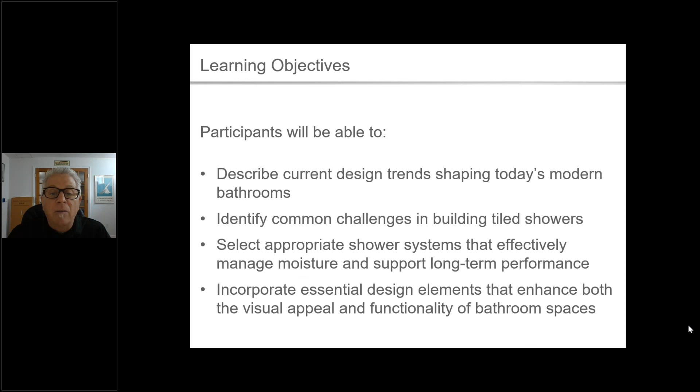But the whole idea now is we're really creating this spa or retreat-like environment - primary bathrooms, even some secondary bathrooms, where we're getting into a lot of design elements. There's a few of them here that you can see. We're going to cover a lot of the stuff, but there are some challenges to this - these are really the changing needs. Certainly the large format tile is something that's on trend and still continues to be on trend. Seems like the tiles are just getting larger. If that's a design trend you're following, certainly you're aware of that.

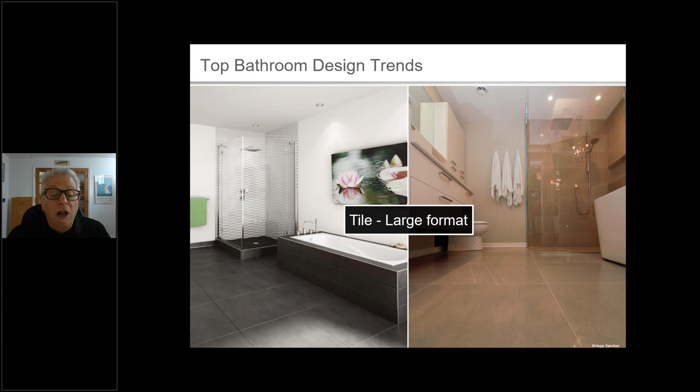The wood look is still out there, the ones that look like stone. These pattern and encaustic type of tiles are back in style on the floor. Even on the left-hand side there, you can see an artfully placed design of different colors and shades to get these type of looks.

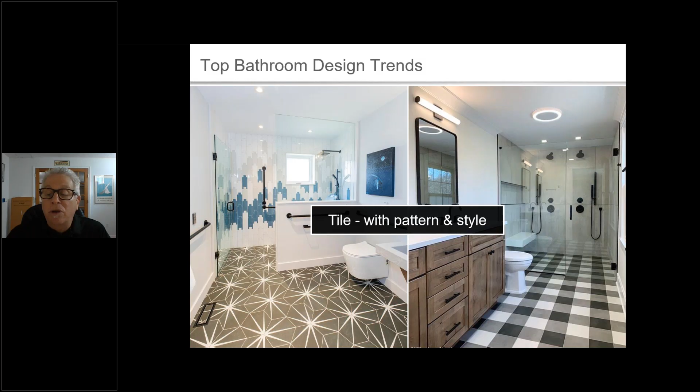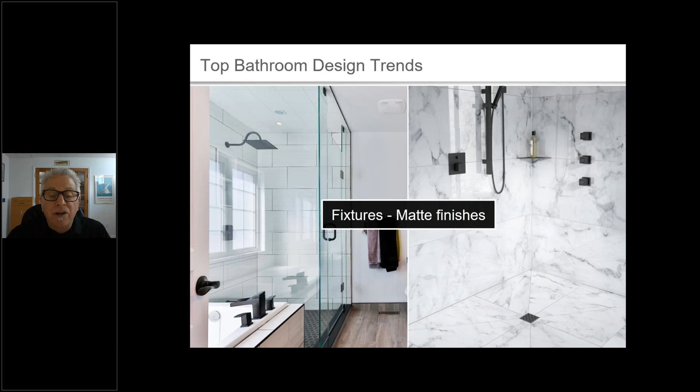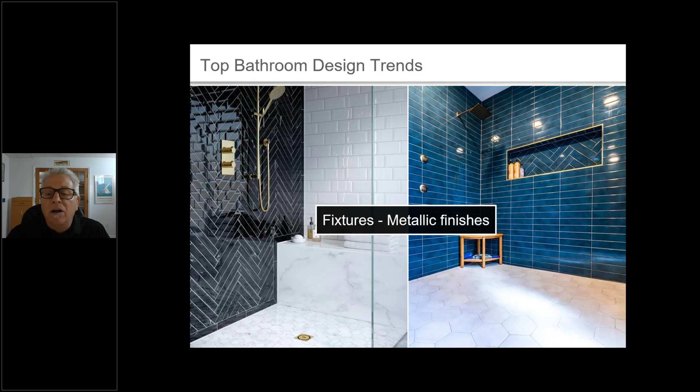So these are all the design elements and styles that you're starting to see. Again, in the fixtures themselves, matte black and matte finishes in various shades are very popular and continue to be. I find this kind of funny after being in the trade so long - I thought we tore all that 80s gold out way back when, but no, it's back again.

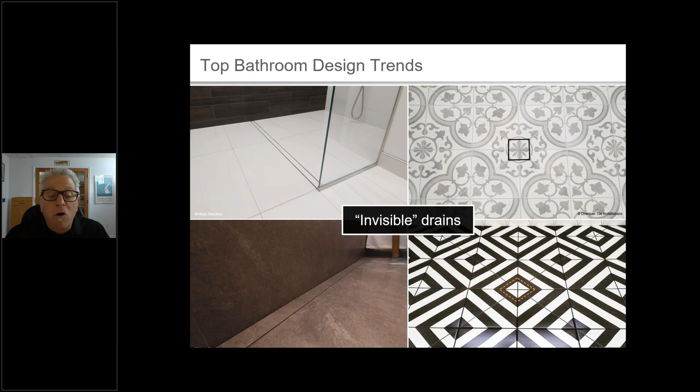But they're a nicer tone, a nicer shade, softer types of metallics that are out there now. And of course, invisible drains - the whole idea is that you don't interrupt your style or pattern. You just sneak the drain in, and you can see them in the images on screen. We'll take a look at both line drains and point drains, which you see in these four images.

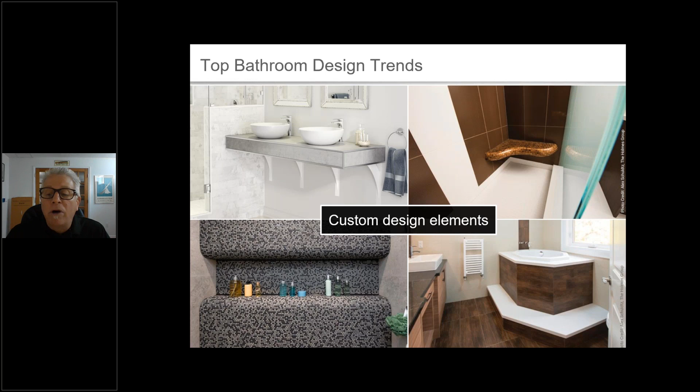Also these kind of custom design elements - this is where I was speaking about how, when you try to incorporate these things with old school methods, it was very hard to get waterproofing and moisture management right. You were using building materials that were water sensitive. But certainly these things are much easier to achieve now, and fit into the workflow, meaning it's not going to add a lot of additional cost or time to incorporate these elements.

Some of the other things - it's not really a design trend, but it's certainly a growing trend and something consumers love - is a heated floor. Certainly if you have a heated floor, you're never going to want another tile job that isn't heated, and the bathroom would be the primary place for that. So we're going to take a look at introducing a warm floor, even the bench top, into this environment too.

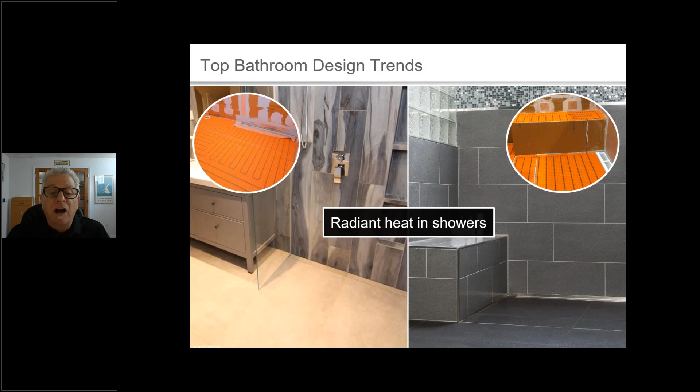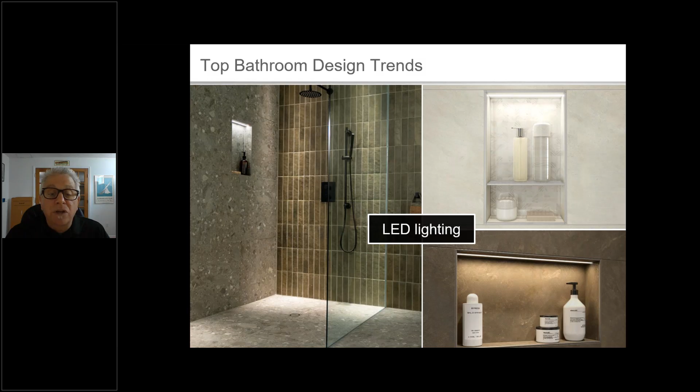Another design element that's fairly new in the tile industry is LED lighting - the low voltage way to add a lot of ambience into your space. Here's some examples, and we'll go into all of these things.

Curbless showers - now, I did a presentation a couple years ago for the NTCA regarding curbless, and it was differentiating between simply leaving the curb out versus doing barrier free, which is a design where there's no barrier to anyone of any ability or physical disability. They can use the same space. Universal design is incorporated into there.

But certainly when you go curbless, that's on trend too. You can see here where the large format tile is carried right into the shower area, so it's non-broken with a different format. So keep that in mind.

So when we look at this universal design, we certainly need to have functionality. In other words, however it works, it needs to manage moisture more than just water - it has to handle vapor form and steam. And then we'll get into carrying these type of waterproofings outside of the shower environment.

So if we look at maybe the sealed system to begin with, let's start there with why that's really happening - it's because the tile surface is not waterproof. Certainly you can see a lot of water sheet off tile of any size. It's kind of water resistant, but it's certainly not waterproof - it will still allow water to go into it. So what you're really asking for in any tile system in a wet area is to have a design, a certain system built in, that manages the moisture.

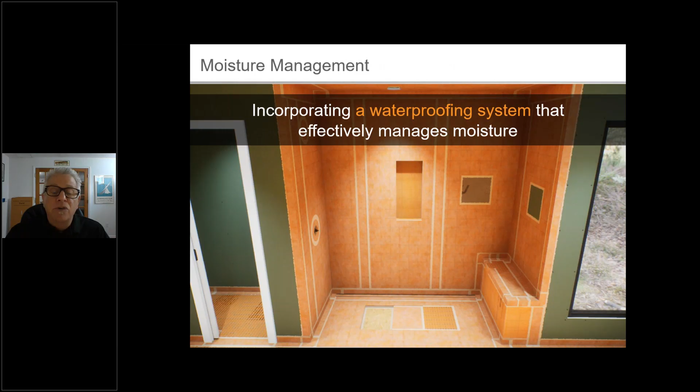So there's really two ways you can address this that are acknowledged by the tile industry. But this one is really growing in popularity - a waterproofing system that manages this moisture right on the surface, right below the tile veneer. So the tile is simply a decorative wear surface. They're waterproof and vapor tight. You can get these in systems from various manufacturers.

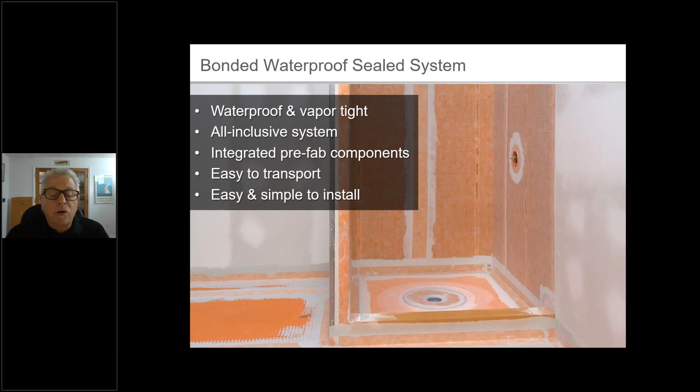A lot of prefab components, which again increase the workflow and efficiency of the preparation time, and they are simple to train someone on how to do. Many of the labor and trades are going into these because they are so labor efficient. So keep that in mind.

So the original ones that have been around for a long time are called water in, water out, because they allow water to get in. Then there's a pan liner that traps the water, and then navigates it back down to the drain via secondary drainage called weep holes.

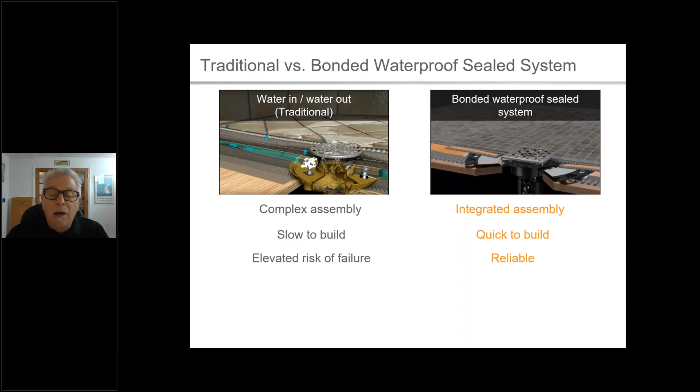The other systems are sealed up from the very top. Those are much quicker to put in, much more reliable, with less risk involved. There's no water penetration beyond the tile surface because the tile, as you see in the image here, is bonded directly to the surface waterproofing.

And then, of course, it prevents mold because there's no water that can dwell within these assemblies at any duration of time to actually promote mold and mildew growth. And of course, we'll take a look at this whole concept.

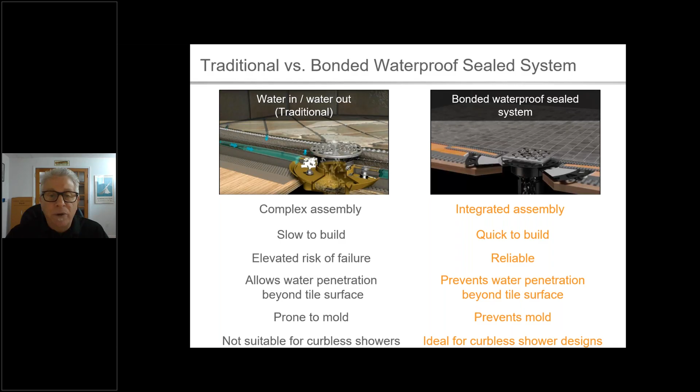They're ideal for doing barrier-free or curbless showers. So yeah, you can do a curbed entry with these. In many cases, we're still building those. They're all still widespread and very popular.

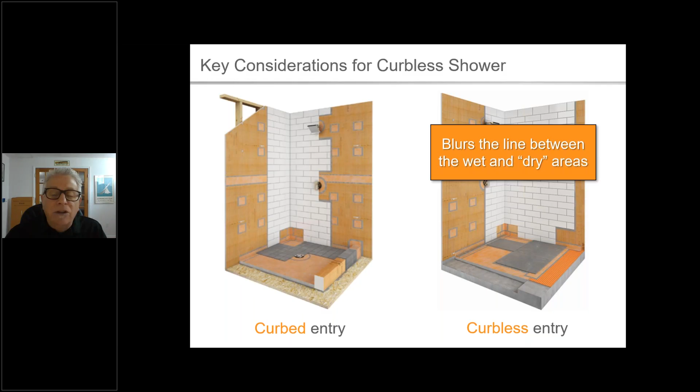But the whole idea of taking the curbless approach is you kind of blur that line between what was traditionally wet and traditionally dry, because you used to have a shower door, a curtain, and a curb. If those are all gone, you're certainly going to have to look outside that traditional wet area in the shower and ask what can we do out there to protect those moisture-sensitive building materials also.

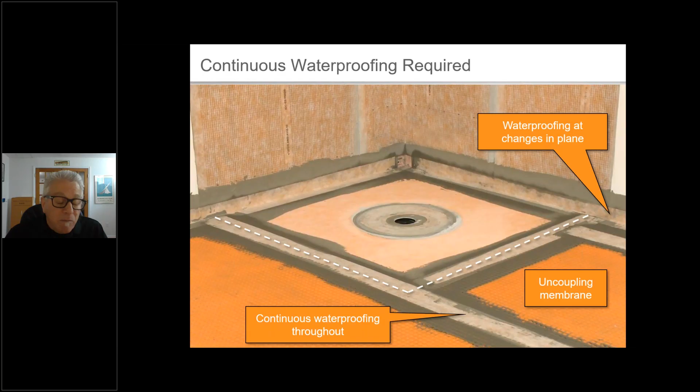So the whole idea with these sealed systems, these surface systems—here you'll see a sheet applied one going right out onto a membrane that is also waterproof in itself. So if you treat all the seams between these, floor to wall, material to material, you do carry the waterproofing far beyond what was traditionally the shower, the wet area.

There is a detail in the Tile Council of North America handbook—well, a few—but I'm going to just highlight this particular one here. It's called 422C. And as you see here, the whole key is that there's what's called an integrated bonding flange. It's a drain that's specifically designed for surface waterproofing.

This is instead of the other ones that had a clamping drain assembly where they incorporated the waterproofing underneath the mortar bed that was put in before the tile was bonded to the mortar bed. These here are up at the surface, the drain flange is up on the surface, and that's really the missing link for many, many years that now allows us to really complete this waterproof system throughout.

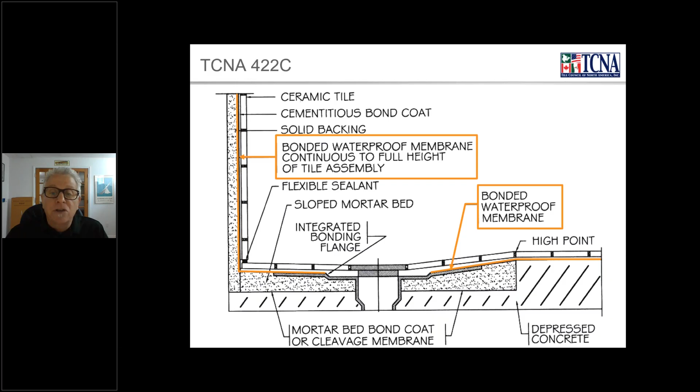This is what I was speaking of, the old pan liners. They're still popular in many places, and in a traditional shower they're still used out there. But there's really no guidance from anyone on how to carry this waterproofing outside of the shower.

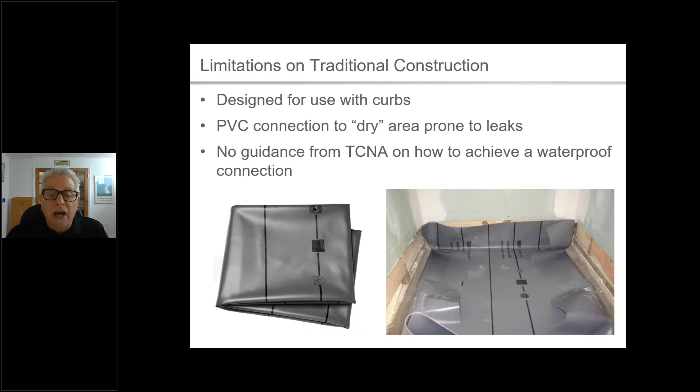Matter of fact, if you look in the handbook with those, you won't see any detail showing how to use a traditional two-stage drain and a pan liner and carry the waterproofing outside of the shower area when you've taken out the curb and the door. So keep that in mind.

Now let's look at these type of membranes that are available. They're available in sheets, but they're also available in a foam building panel. You'll see many different manufacturers out here. I've got two examples from two manufacturers on the left showing the sheet applied, and two other examples of two other manufacturers that make a foam core building panel.

The nice thing about those are they are totally waterproof at their surface as you install them. You just have to treat the seams and penetrations. They're waterproof throughout. They don't have any particular type of material within them that would make them water sensitive. So even to the core, they are all waterproof and they're ready to go.

As you can see, you can put them directly over studs in this case, because this would be taking the place of a typical half-inch panel that you would put around the shower.

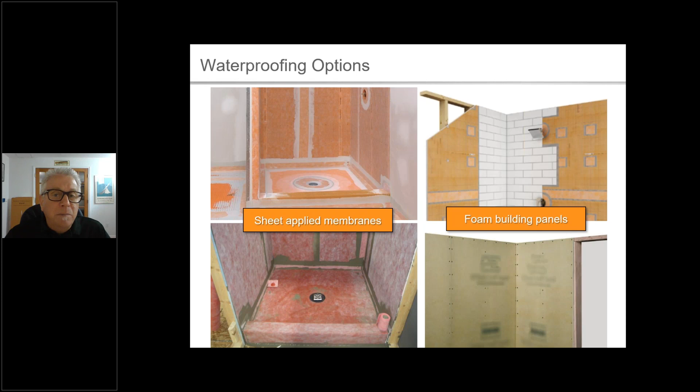And then there's also the membranes here. You just have to make certain that they're waterproof and vapor tight, that there's no organic material in them, and that's the ANSI number you're going to look for on these particular materials: 118.10S. S stands for sheet, and then there'll be an L, which stands for a liquid-applied one that you put on like painting, with a roller, brush, or sprayer. So keep those in mind.

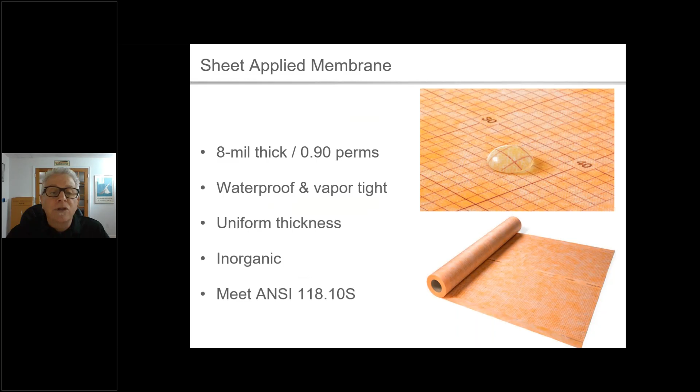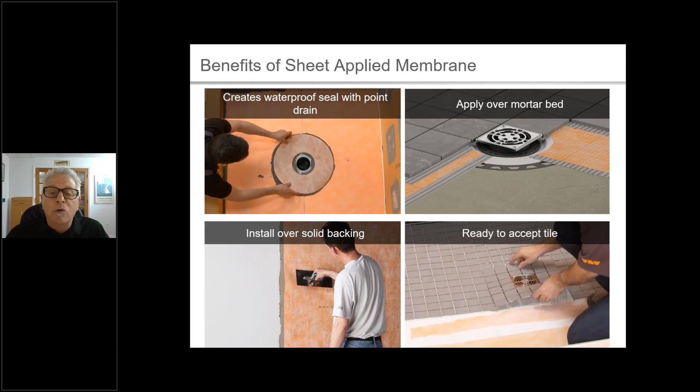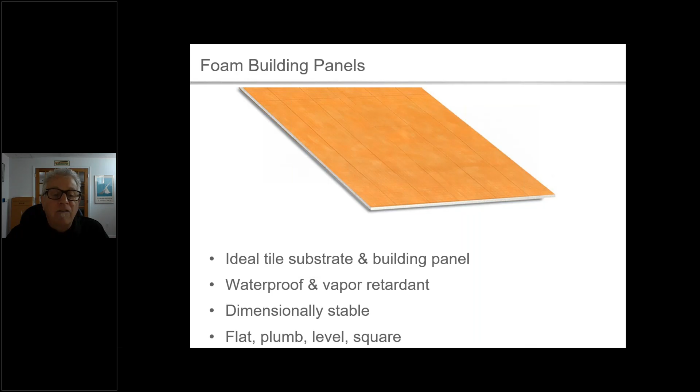The nice thing about these are they are ready to accept the tile after you put them in. They go directly over many, many kinds of suitable backings that you can apply them directly to. The same thing with the building panel—you don't have to put a panel up to put this in place. This is your panel that you can attach, as I said just a minute ago, to the framework if you want. And it gives you the dimensional stability that you want.

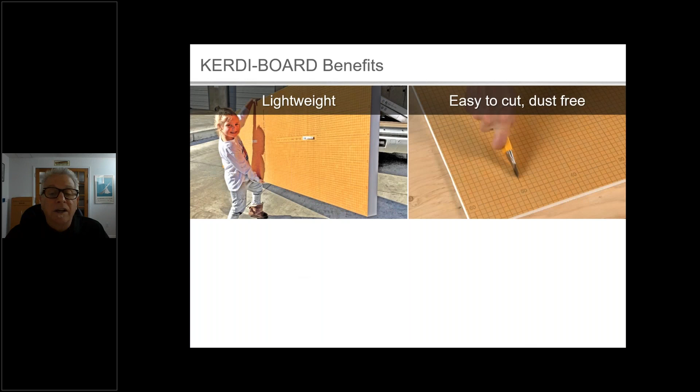You can see from the picture here that even when you get to the thicker building elements that you can use for benches and pony walls and so forth, the vanity tops, they're still very lightweight, easy to cut, no dust. Dust is a big issue on job sites these days. It goes in very quickly, and it's ready to have the tile bond directly to it via a thin set mortar.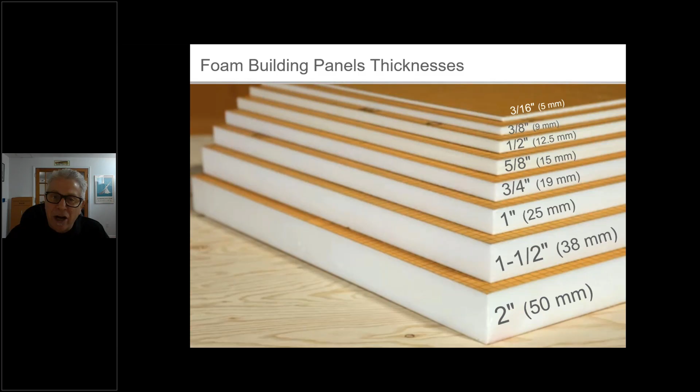So here you've got, as I said, shower enclosures, bathtub surrounds and decks, benches, vanities. There's all kinds of things that you can construct out of this type.

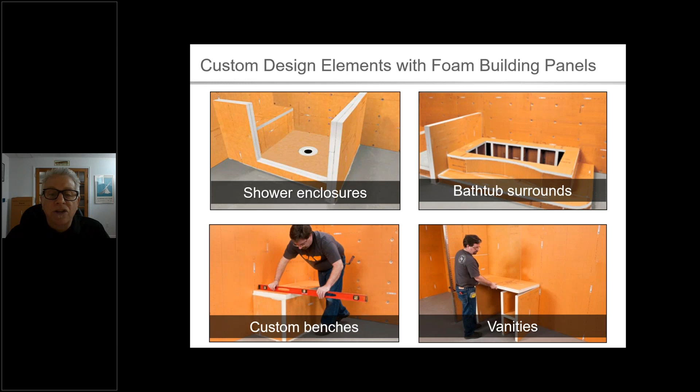So now let's focus on the drains that are available to incorporate this surface waterproofing. Certainly the point drains have been around for quite some time, and they're still used readily, but there's all kinds of line drains available out there, and we'll go into that a little bit. And then actual custom length types of linear drains too.

So the point drains are great. They've been around for quite some time. You can see from the little inset picture how you have plenty of surface area to incorporate the surface waterproofing right down onto the drain flange to carry out your waterproofing connection there.

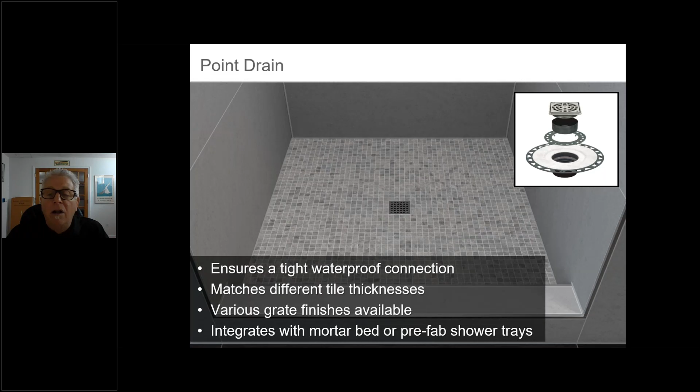Lots of different drain finishes. Look at the tileable one at the bottom. Many manufacturers have something like this available where you don't even see a grate. There's no metallic or colored grate there at all. It's just another little piece of the tile. So that gives you more of that seamless and invisible look too.

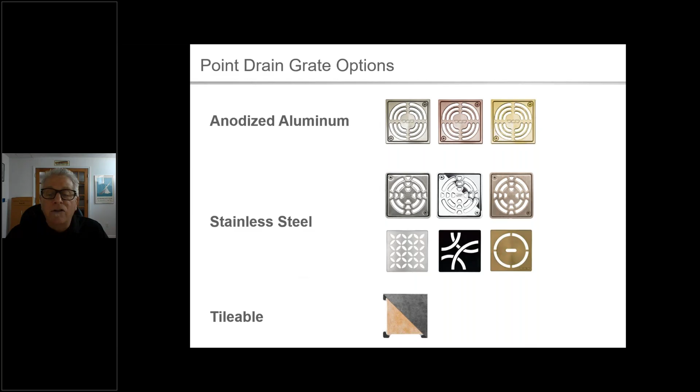So you can see that in the upper right-hand corner there. One of the tiles has been put over the top of a support, and then the water just drains around in what's kind of the missing grout line, if you want to look at it that way.

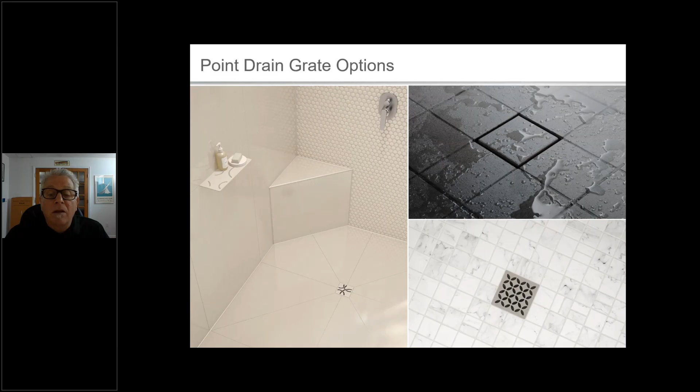Then the line drains. The nice thing about the line drains is when we're using large format tile and we're carrying that same tile right into the shower area, you don't have to interrupt that and go to a smaller format. One of the downsides or limitations of a point drain like I just showed you is that because of the dish or bowl shape of the shower pan area, you're limited to how big a tile you can put on that surface.

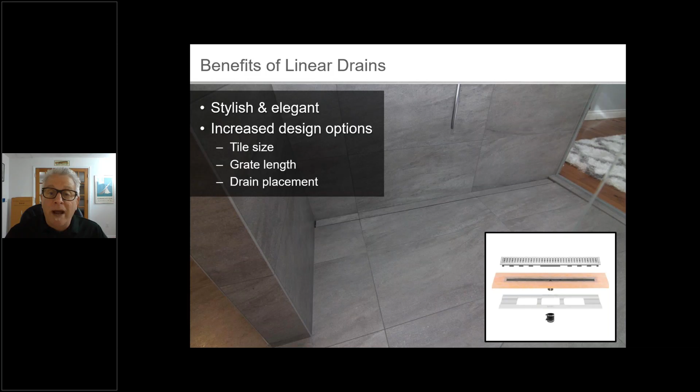But with the line drain, no limitation at all. It's one flat plane that just slopes down to the line drain, so you can carry the same large format right into the shower area. One of the reasons it's really, really popular, by the way.

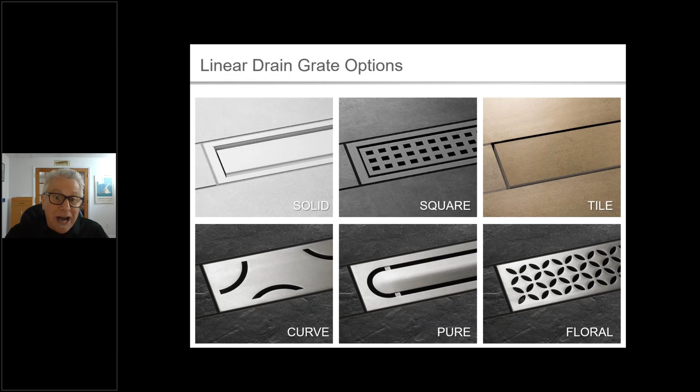And the amount of drain grate options - you can see here different types in metallics or finishes that will complement or blend into your tile that you select. Also, the tileable one on that is very popular too.

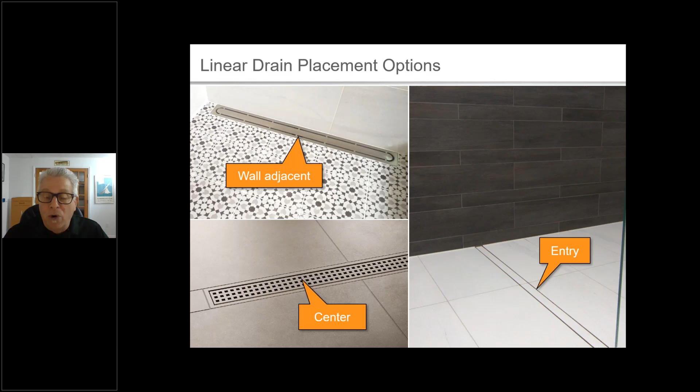You can see here, you can put these placements at the back wall. You can put them in the center of your shower going in either 90-degree angle. You could put them at the entryway, which is very popular because then you don't have to build up your whole bathroom floor to get a slope into your shower. These fit at the front of your shower and they just intercept the water as it's running towards the door. When there's no curb, there's no door, it intercepts the water and it drops in there.

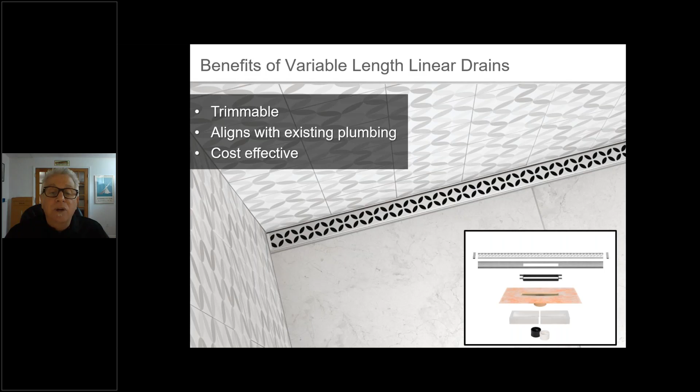So that's a very popular option there. The other ones are trimmable, where you customize and cut it to your exact length of your shower so you can get virtually wall to wall. So keep those in mind that they're available. Different types of grate options are out there from various manufacturers. Here's just a little sampling of some of the designs that you could get in those.

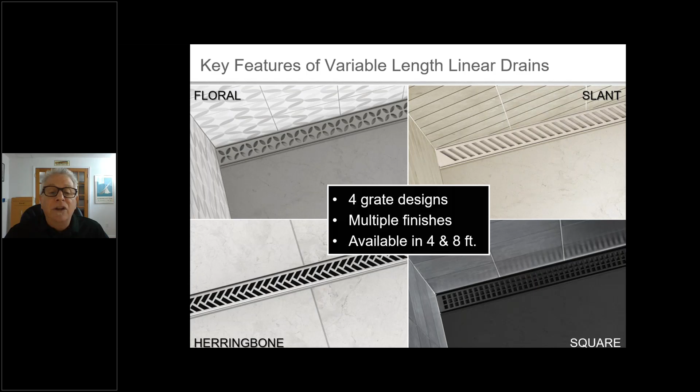Now let's look at some of the other types of design elements that the consumer really wants - shelves, benches, and we'll get into niches too. So these are really optional components. You can really build most of these with just a drain and a waterproofing sheet or liquid applied. But here, this is where you get into some of these options, these design elements that will either speed up preparation or enhance the actual design and beauty of the shower.

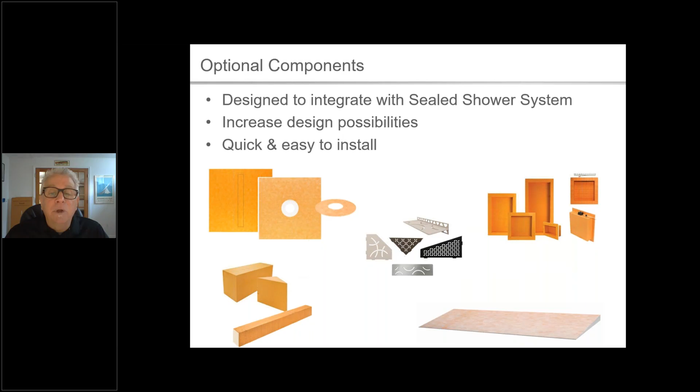So various trays are already waterproof, with the slope built into them that accommodate either point drains or line drains, as you see here on the screen. Benches - you can make your own custom-made benches, but many manufacturers have these in various shapes and sizes, so they're kind of plug and play. Again, it speeds up the efficiency of the preparation.

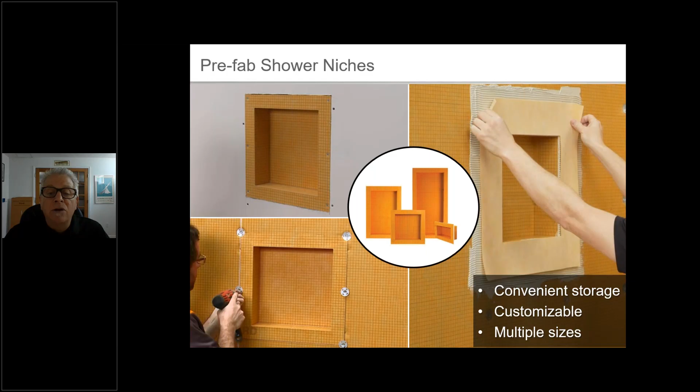Niches - again, people just love to have niches in there. There's quite a bit of labor required into actually putting in a niche, from building it to tiling it to grouting it. This is certainly going to cut down on the amount of time it takes you to actually build your niche. And these come again in the foam core or very much waterproof materials from various manufacturers, and they're easy to incorporate right into your wall design. Here's just showing a few of them.

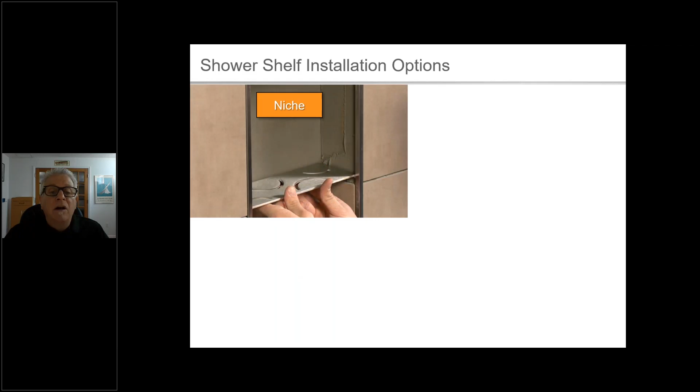Now we're going to introduce maybe some shelves that you would put in there if they're fairly tall, so you can have 2 tiers of storage in there. They go in when the tile is actually installed, or you can get ones that fit in.

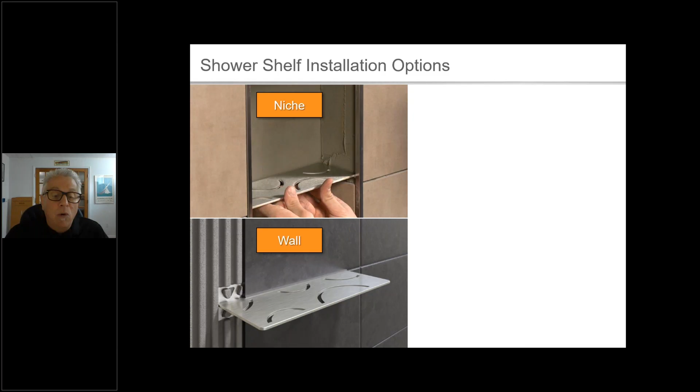There's no niche, but they're actually a shelf that sticks out. Like this one here, you can see the anchoring legs holding it behind two courses of tile. Corner shelves, again, that just go right into the grout lines.

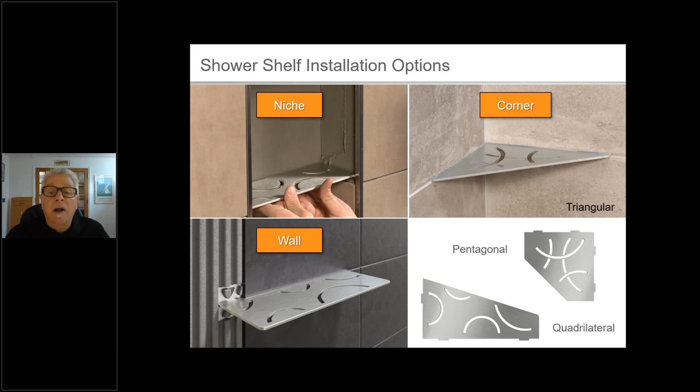This is something that you can actually retrofit on a shower or tub area that's been in for quite some time too, so keep that in mind. And then there's the different sizes.

You can see here vertical and horizontal in various sizes. The nice thing about this stuff is it gives the control of the substrate back to the tile installer, like back in the old days, back where I hearken from, where the tile setter would actually introduce a mortar bed to the vertical and horizontal surfaces and then bond tile directly to it. Since the tile setter actually built that, they had control of it because they built it themselves.

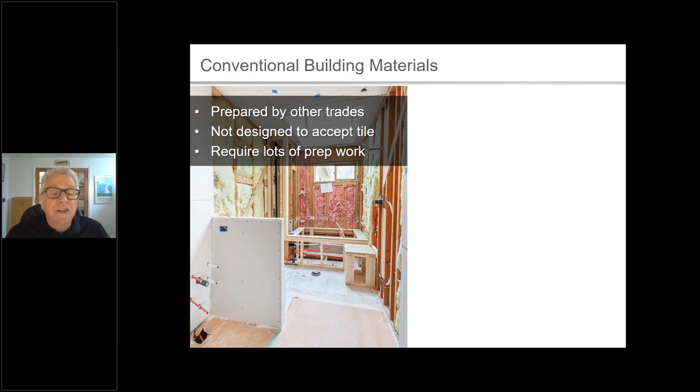Right now, we kind of are at the mercy of other trades to give us our substrate that we're gonna tile directly on. And of course, it's not very plumb or square, or it certainly isn't waterproof. It's very moisture sensitive. So you're going to have to do some remedial work to these anyway, even if you're using this type of element.

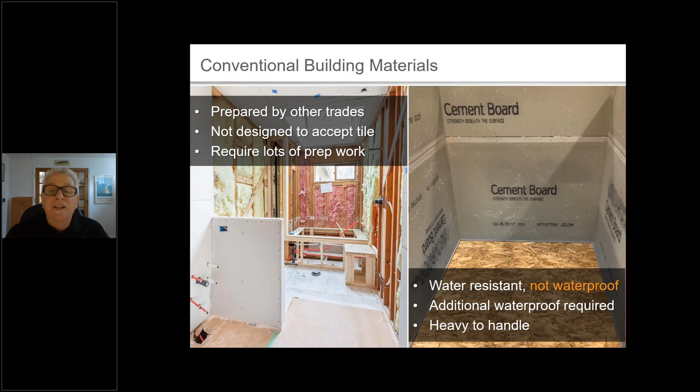And even these type of boards here, again, water resistant. They won't break down even if they're totally soaking wet, but they still allow water to pass through and into the wall cavity. So keep that in mind. So that's where the foam panels come into play, because they are dimensionally stable. They're not affected by moisture. So keep those in mind too.

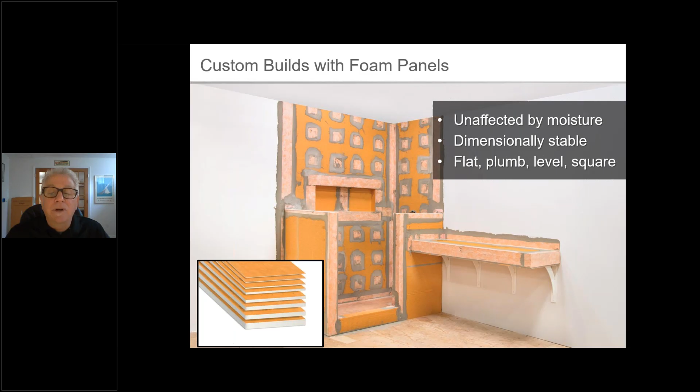And just some custom builds of stuff that you could build out of foam panels. You can see a vanity here, which also would meet the requirements, at least on the right-hand side, of someone in a wheelchair, so they could roll right up and get underneath that vanity. That could be the case.

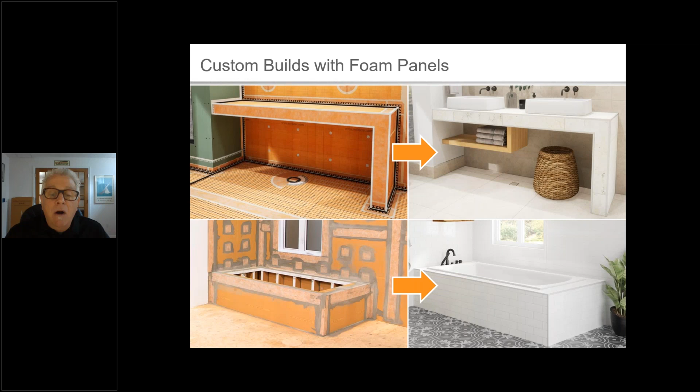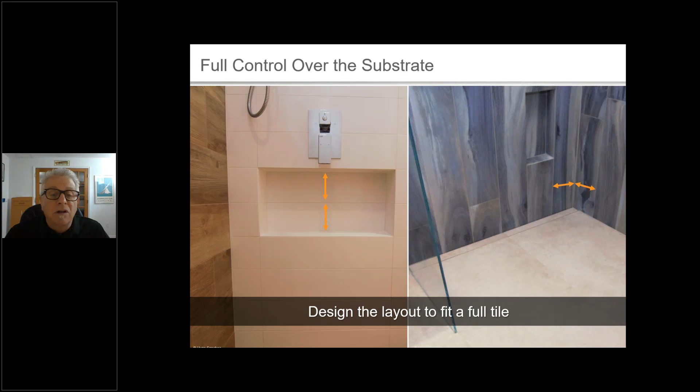And it's nice because you can have the installers put these in with your layout, so things will balance out and be very aesthetically pleasing. So keep that in mind.

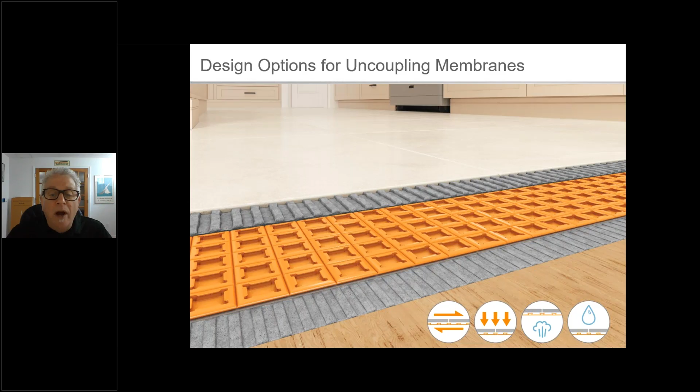And then we can incorporate heat. So we add another icon to it saying it's going to actually hold the cable in place that you're going to use to heat the tile floor to make it very comfortable to walk on. So that you can add that icon.

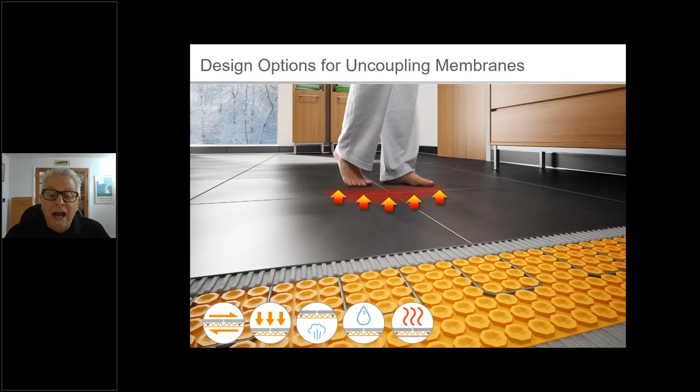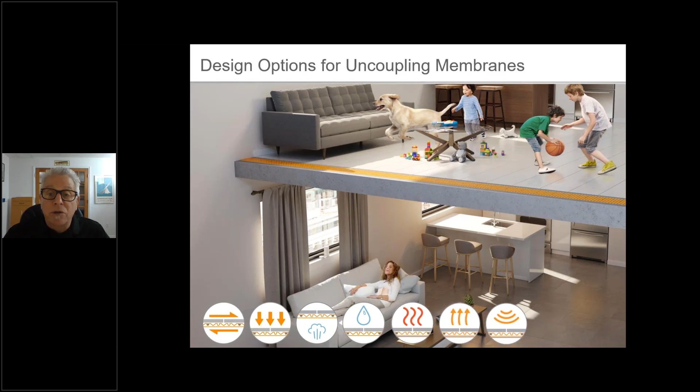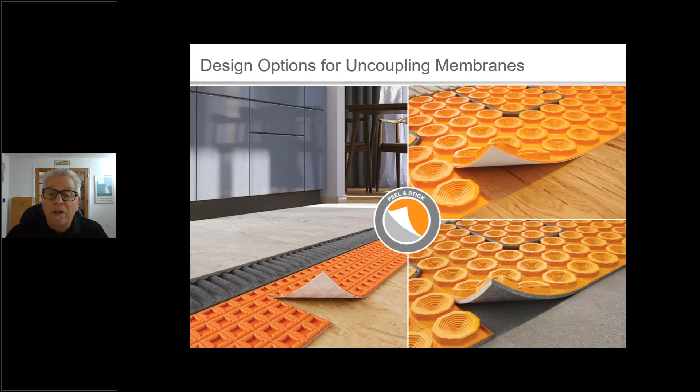And if you wanted to go even further, if you have some concrete substrates from unit to unit, you can actually add in sound control and some additional thermal barrier into the assembly too. So keep those in mind, that those are out there too to incorporate. Many of them are a glue down. Some of them can be peel and stick down, which again eliminates a material and an extra step in the installation for preparation for tile. So keep that in mind too.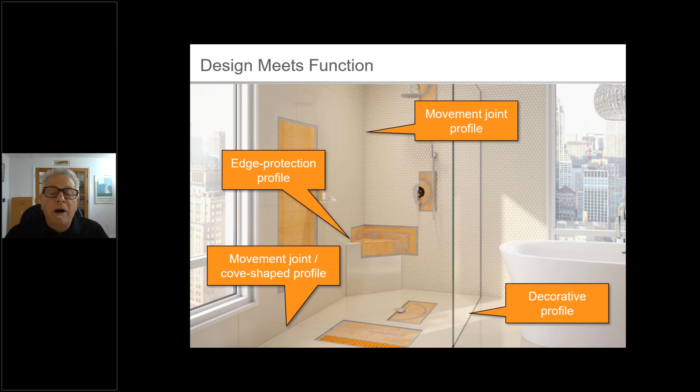So how about some of the other things we're going to finish things out with? The edge protection, how about movement joints, how about just decorative profiles? The thing about so many of the tiles that are on the market now, you have a huge variety of tiles as far as sizes, shapes, colors, textures and looks that are out there, but many of them do not come with any way to finish off the exposed edge that just is going to show the clay, the stone, or the porcelain body. So there are several profiles out there that can do just that.

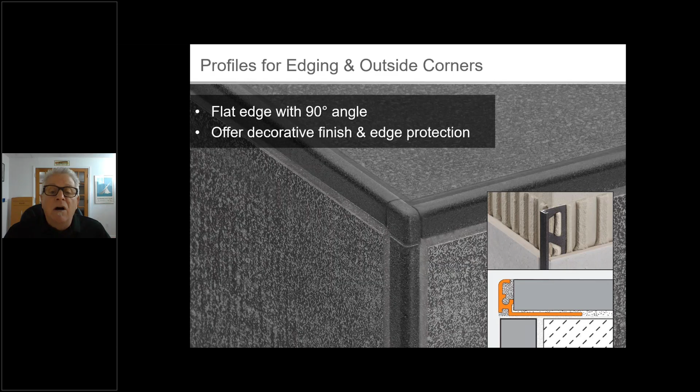The nice thing about that is it really broadens your possibility for what you want to choose in these environments, because you're not limited to just the ones that come with some sort of tile trim. Here's a particular one that simply covers up the edge of the tile that didn't have glaze on it, or maybe was cut on the job site to fit, and you don't want that exposed edge showing.

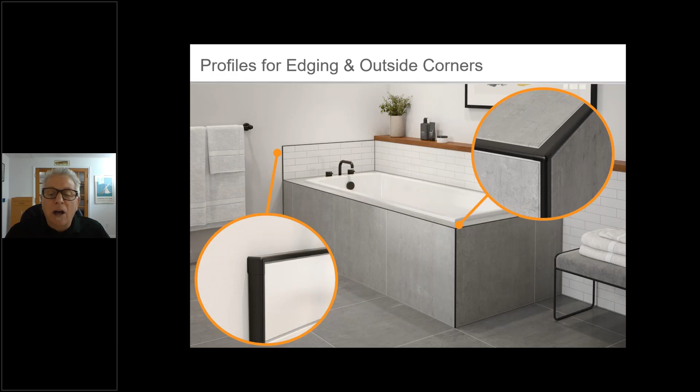We're showing it in two examples here, up around the backsplash and here on the tub deck. Here's one that's more of a square edge that complements the tile, and comes in various colors, finishes, and textures. Keep that in mind.

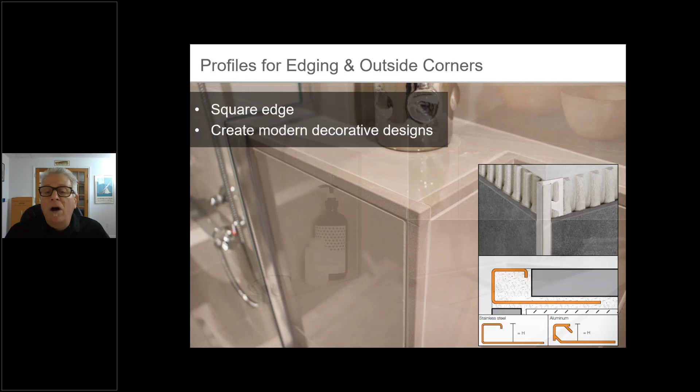You can see it here on the niche, going in and actually making a sink out of a short little line drain, not having any sink of any sort in there, but just all tile and the profiles and foam core to build that whole thing. That's a really neat design element too.

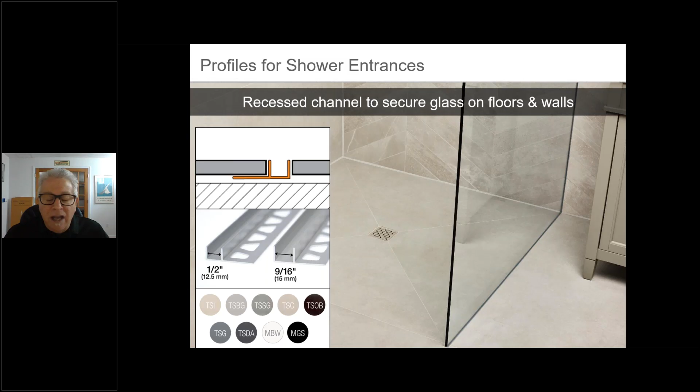This channel actually holds the splash panel or fixed glass panels in place, so you don't have shower door installers drilling holes in your waterproofing to put in clips or other fasteners. This is simply installed by the tile setter right where you're going to put the panel, and then the panel is placed in with some sealant, usually a clear silicone of some sort. You can see how that goes.

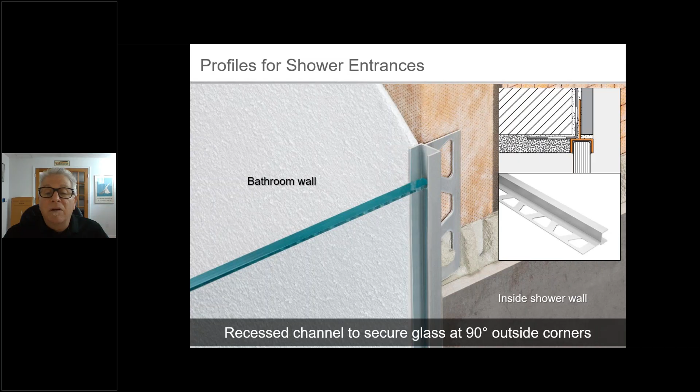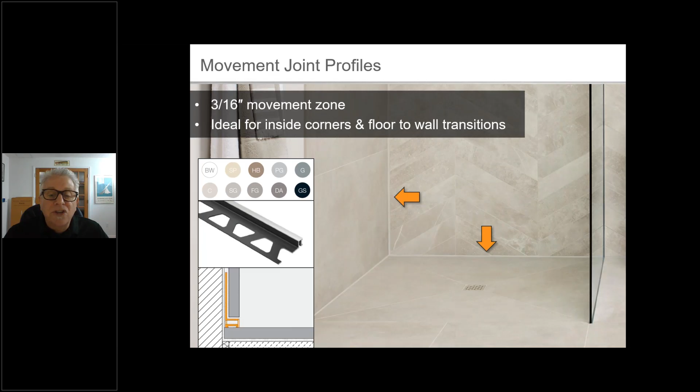Here's one that goes straight off of the wall and gives you a panel with a bit of a different application. And then for movement joints, we want to put something soft in there instead of grout. So there are pre-manufactured movement joints that come in various sizes, widths, and colors to complement your grout or tile. Keep in mind those are different options.

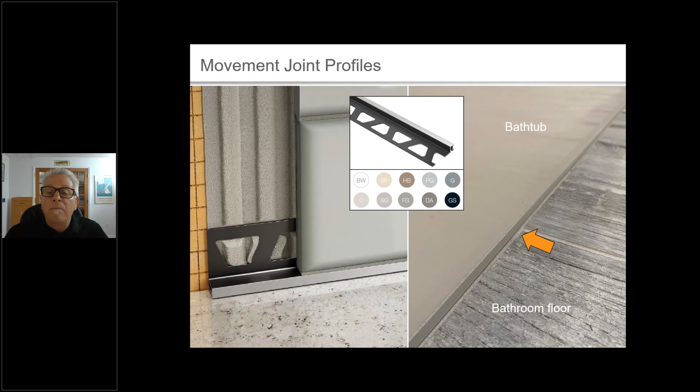I like the one on the left where you're incorporating that over a solid surface or stone on your backsplash, say in a kitchen, or up against the edge of a bathtub where the tub could be a restraining surface. Keep that in mind.

Also, hardwood transitions. If you're doing a transition with two hard surfaces, tile and wood, both need a little room to move independently of the floor below them. This allows you to address that movement requirement.

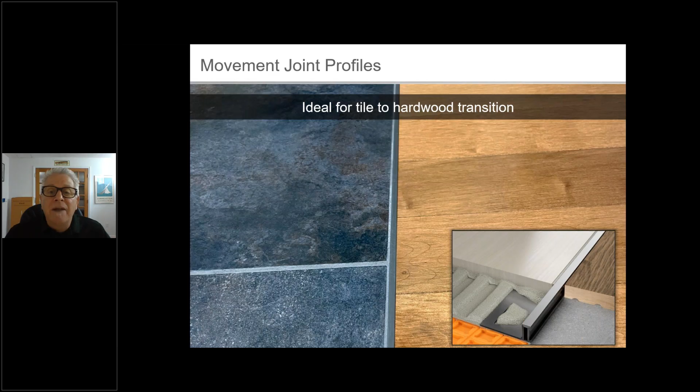And here, floor to wall connections, inside corners—keep in mind those are available too. This takes away one of those ongoing maintenance issues you have if you grout it and the grout cracks, requiring someone to apply caulking, which has a pretty short lifespan and needs to be torn out and replaced. I think many of you are aware of that, so keep it in mind.

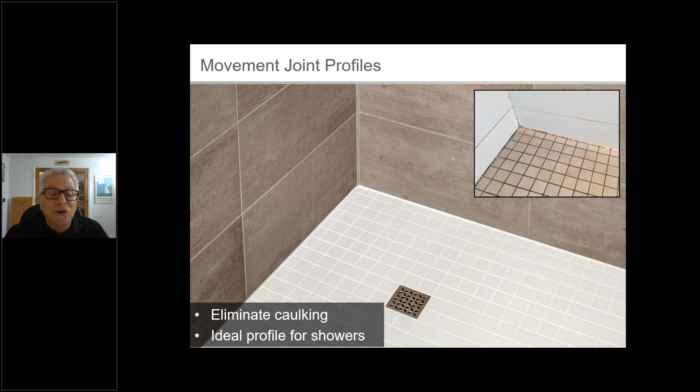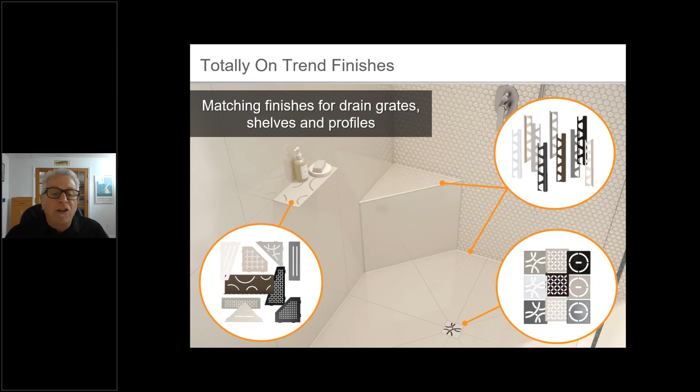As far as the finishes and textures available on the market from many manufacturers, you can certainly find all of these things to suit your needs and meet your design desires. This really opens up unlimited design possibilities and your selection for so many other tiles, because this is the trim you'll use to finish off exposed edges and turn corners.

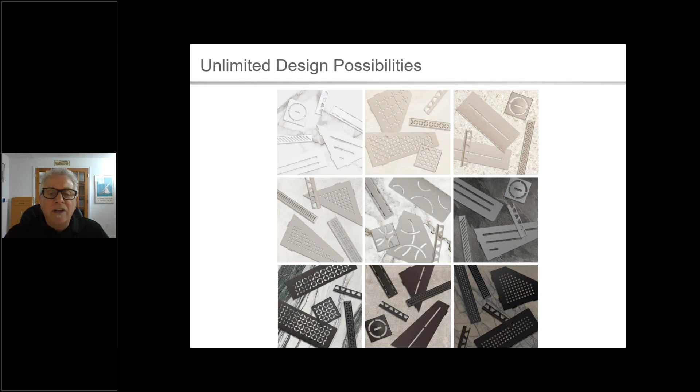Terminate walls, and of course all of the drain grates, the shelves, the niche shelves, and all of these other design elements are going to be part of it. Just some more examples of the different ones that come in colors to complement that.

So there you go, that really kind of ends the presentation. It gives you a lot of examples of how you incorporate design elements but still get the function required by the trades, like the tile setter, plumbers, and different builders. So yes, we can have both—the design that everyone wants, and also the function that's required in these wet areas.